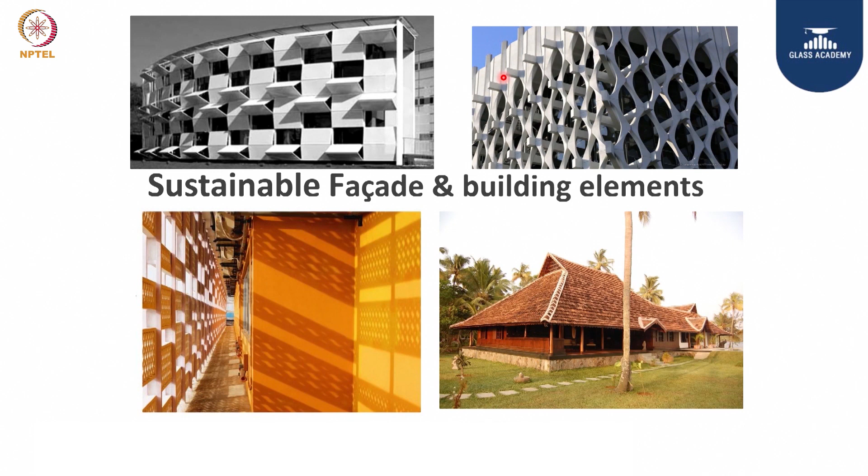In the next 40 minutes or so, I am going to talk about sustainable facade design. People are aware of how the facade looks when you look at a building from the exterior in various places in this country. But the facade design has to be climate specific. Depending on the location, the facade design should vary to reap maximum benefit on building performance and indoor environment, besides aesthetics. So you can't have the same design replicated everywhere in the country or across the globe. It should be decoded and indigenized to the local climatic condition.

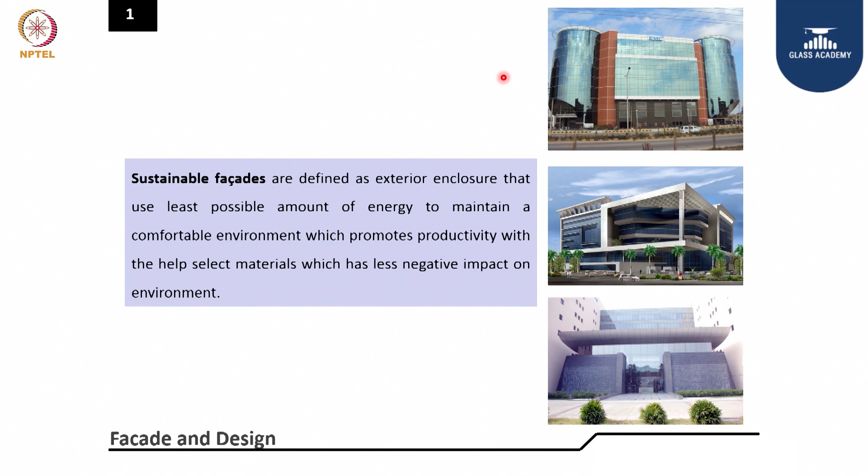This is how the facade should be designed to take care of your building's operational energy and occupant comfort. What is sustainable facade? It can be defined as an exterior enclosure that uses the least possible amount of energy to maintain a comfortable environment for building occupants, without having any negative impact on the indoor environment. The building material used for facade design should also have minimal negative impact on the environment. So it's not only about operational energy performance or occupant comfort, the facade material should be eco-friendly with very minimal negative impact. You can't eliminate the effect on the environment because we use virgin material, but you should know how to compare two materials and select the one with less negative impact.

When you look at why you need a proper facade for a building, why not just leave the building as is? It improves the building's aesthetic value. You can look at different buildings in different locations in this country and get a wow factor when you see certain buildings from the exterior. In early days we used to see the LIC building in Chennai about 20-25 years back, a tall building with an elegant look. So that is also required, and that's why the architect plays a major role in improving the aesthetic value of the building.

Due to the tropical climate in this country, the facade needs to minimize heat gain to the building. When you minimize heat gain, you save energy during occupancy, and when the facade gives comfort to the indoor environment, you improve occupant comfort and productivity. The focus should be on energy efficiency, how you bring daylight to the interiors, how you provide a view to the exterior environment, how you minimize glare to the occupant. Otherwise you have to put up blinds and cut down the daylight and the beauty of aesthetics, working in a dark environment with artificial lighting.

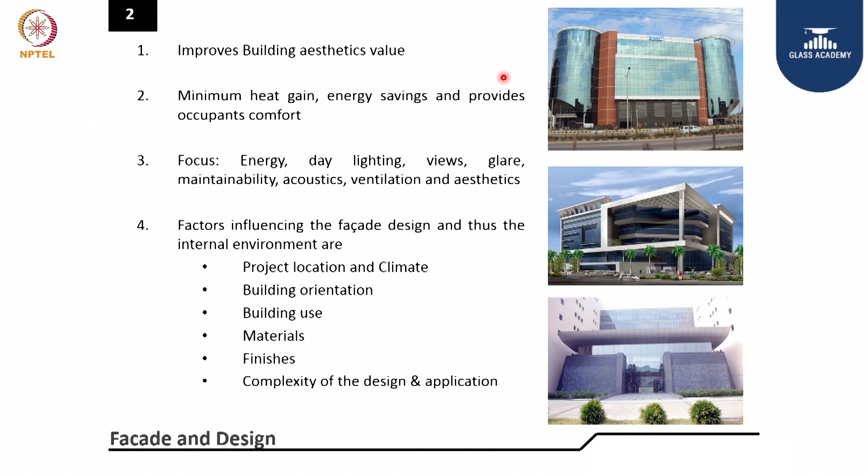It's like a person wearing clothes. So it's very essential for facade engineers and all other system engineers to be part of the design from the start, to ensure the facade is properly conceived to get the maximum benefit out of it.

Let us talk about orientation—how it has to be in India. For our warm climate, we normally get cool light on the north, and south can be managed easily. You can't have more exposed area in east and west. If you have the opportunity in a site to orient your building, we normally go with more north-south orientation and put less load on the east and west. Even if we get east and west exposed areas, we can create some space that can be utilized for services like a service core, lift and toilet facilities, which act as a heat sink so that heat from the east and west in the morning and evening can be arrested to a large extent. So normally our exposed areas should be more north and south facing.

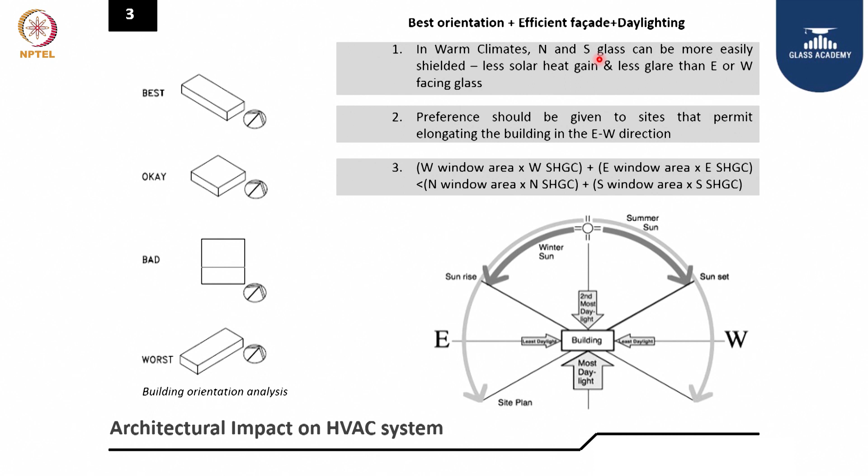North will be a cool light. You can have more glazing to get that daylight penetration to the interior. South can be managed with some sort of facade design in terms of projection material.

The orientation, once you have an orientation, normally we have two standards we follow for the glass selection. One is Energy Conservation Building Codes of India, the latest 2017 standard, and ASHRAE 2010, the latest standard that has come into the market. Both define the specification for our climate. ECBC defines India into 4 climatic zones, and ASHRAE defines 1.

But more or less we are talking about SHGC of 0.25 as a standard for India. So our study with 400-500 buildings shows we need to target around 0.2 to 0.25 solar heat gain coefficient to optimize the heat ingress to the building and bring the optimum daylight.

So north, yes, though the standard says 0.25 SHGC, but for north you can still relax, go up to 0.5, 0.6, because there we are getting a cool light. The rest of the areas like east and west, preferably reduce it to 0.2 to maximize the benefit.

Also you can have overhangs wherever required on the facade. You can look at here, so that the projection angle can be optimized or designed based on the heat ingress and sun path study, to get the sun angle hitting the bottom, not the glass.

So the projection angle for the sun has to be designed so that the sun angle will never hit your glass. That way you can get diffuse light to the interior, not direct heat gain on the glass, which affects your indoor building performance. So projection angle and projection depth has to be decided based on the glass height and width.

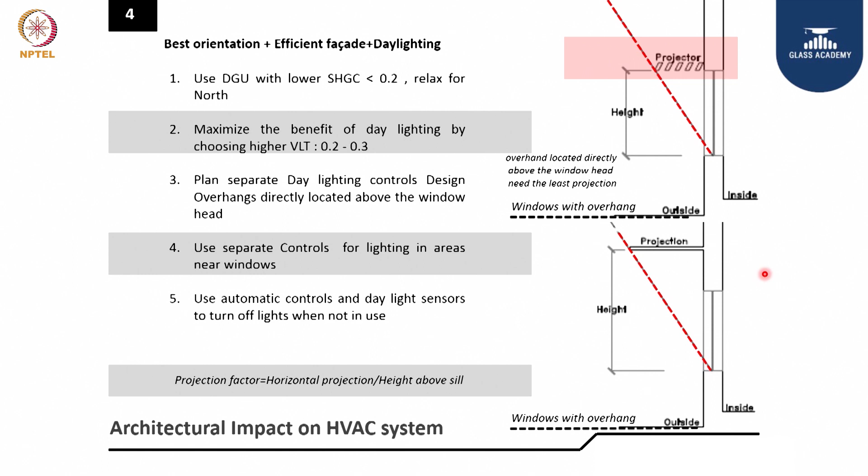This is how the general approach for the facade design and projection, or sun plus glass selection works. You can see the projection angle will be smaller here since the window height is small, and when the window height is more, the projection angle has to be a little more, so that light will not hit the glass directly.

So particularly when you talk about north side, you can go up to 0.45, even 0.5 sometimes, but the rest of the areas you can control. Predominantly you have to reduce it to 0.2, so that the light penetration can be optimized, at the same time heat ingress can be minimized.

So ultimately I look for a window to wall ratio of around 20-30%. That is the best number to be achieved for optimizing the heat gain to the building. So 20-30% window to wall ratio is the best one to design for a building to optimize the heat gain.

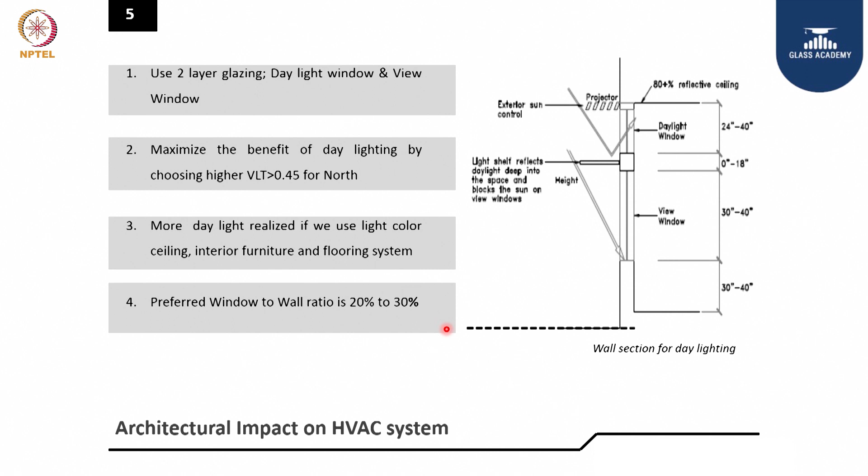Then when you talk about the U factor, there are three major factors we normally look at for a glass. One is U value, second one is SHGC, and the third one is visible light transmittance. So all three have to be balanced to get the best out of the glass facade you have.

Glass is very vital for a building, wherein we need to get the view to the exterior and the daylight penetration. At the same time, how do you optimize heat ingress? So we normally go for lower SHGC, lower U value, and higher VLT. That's how the combination is worked out for a building to optimize performance.

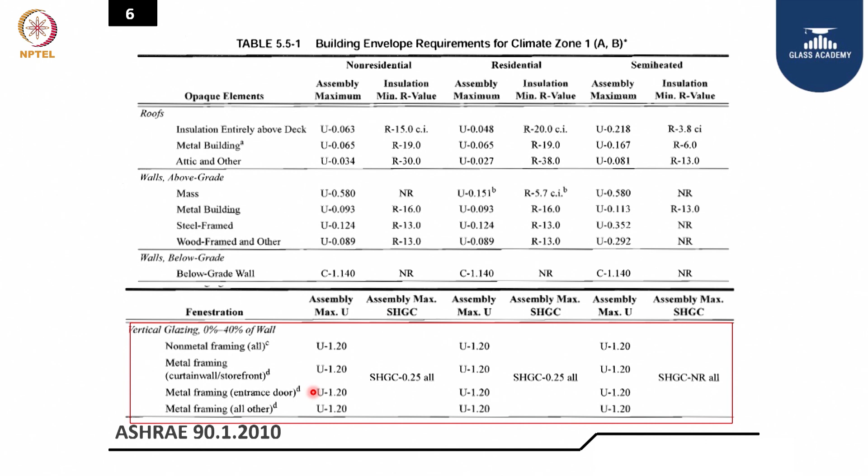This is from ASHRAE 90.1 2010 standard. Even ECBC classifies into 4 climatic zones: composite, hot and dry, warm and humid, and cold.

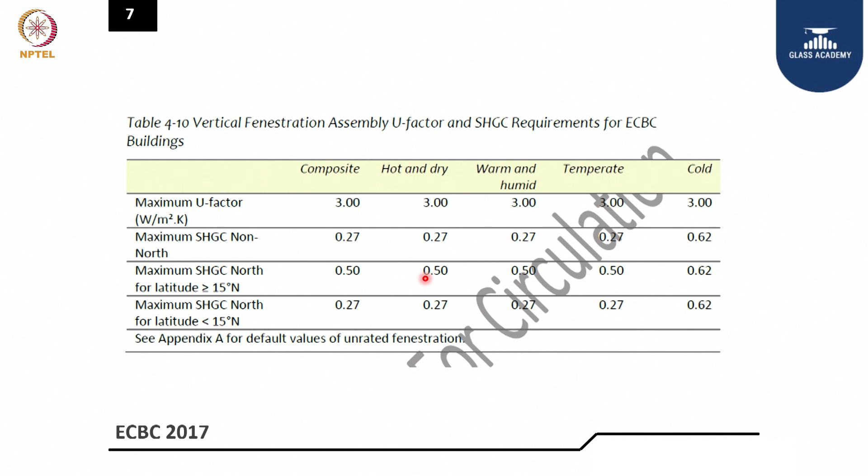So these are the major 5 climatic zones, and the factors are defined here very clearly what kind of glass needs to be selected for this building. The moment you have a facade design or the surja has been designed, these values can be a composite value, including your projection factor plus glass. Together you can even relax a little bit on your glass to get the total performance of the building.

You can look at some of the facade designs, what is happening, and this is an unconventional way. You would have seen all conventional designs here: plain wall, glass, recessed glaze windows, then the shading, surjas and fins, etc. These are some of the unique things.

You can see the green walls, fully covered green walls, and here you can see the fins made out of wood, which is motorized, and depends on the day of the sun angle. You can adjust these blinds and control the sunlight heat ingress. At the same time, you can allow the light to penetrate, plus heat can be arrested.

And this is BIPV, building integrated photovoltaic, wherein you generate solar energy from the solar panels, which will arrest the heat ingress. At the same time, it allows light to penetrate.

Now you have a thin film technology, you can place it on the glass, which will generate power, and now people are coming with glass which has got inbuilt solar thin film, wherein you can generate power and also act as glass. And this is another one, R&D work is happening somewhere, I remember about in Germany.

Algae is formed in the glass in between 2 layers, which will arrest the heat ingress to the building and bring beauty to the building. This algae will be removed often to make it as manure for the garden, and it regrows, and they supply oxygen once in a while for the algae to survive.

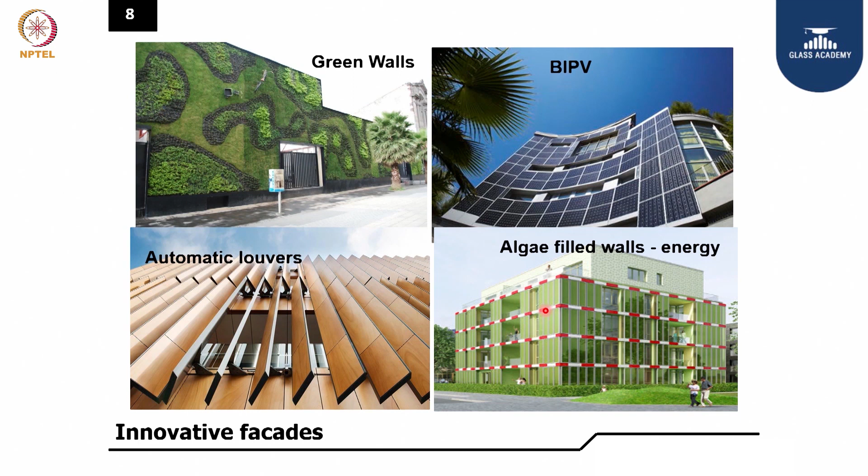So these are some of the unique designs happening to bring beauty to the building, at the same time improve the building performance and aesthetic value.

What are the tools available, normally we do in India? Basically, you have to go for facade shading analysis - how throughout the entire 24 hours, you can check for every day of the year how the shading and sunlight penetration affects the building. Then daylight analysis, how this facade is giving daylight to the interior environment, wherein you can control the artificial light and save energy.

Then heat gain analysis, how the heat from the facade impacts your indoor environment and air conditioning load. Then sun path analysis, understand the sun angle, then you can orient your building or design your facade to cut the heat directly into the building.

Then after all this analysis is done, finally you come to how this building is performing overall on energy - how much HVAC energy is consumed in this building, how much from lighting, how much from equipment. Even you can divide further into ventilation system, occupancy. So you have to bring this number, then revisit again, see how we can optimize to control this energy.

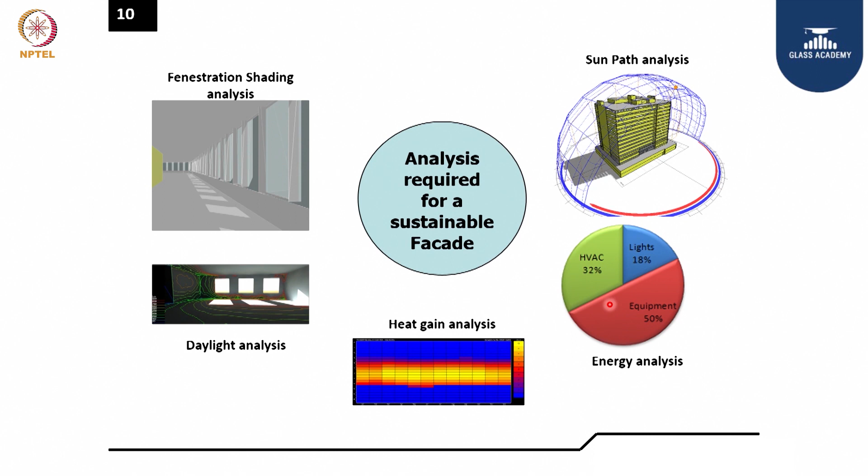So 32% in a commercial building is a good number. Can we do 29? The moment you have this analysis, you can keep revisiting and come back to the overall energy performance. So this is how the approach should be for facade selection and implementation tomorrow for any building.

And when you do the shading analysis, what does shading analysis bring you onto the table for you to optimize your facade? Impact on shading devices, what kind of shading devices you have for the facade, and optimum shading. Can I go with 600 mm Sarja or 400 mm or 200 mm or 1000 mm? That will be decided based on the shading analysis.

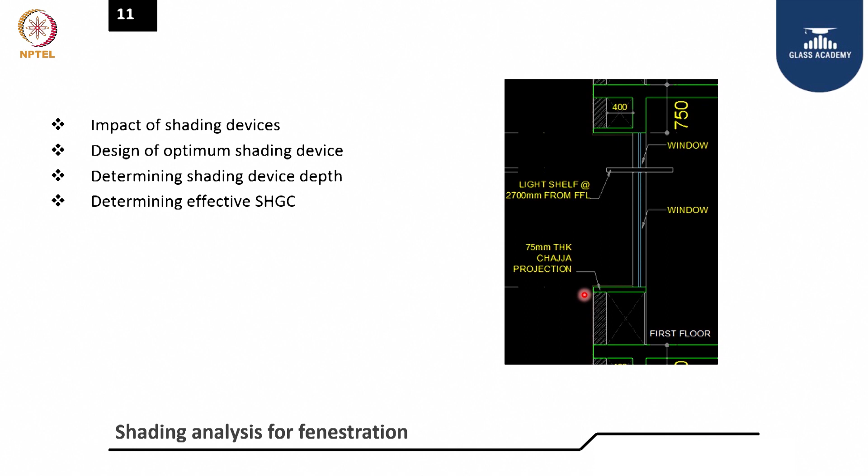And how much is the depth, and what will be the effective SHGC, and what will be the glass selection for a particular fin or Sarja or projection device. So that overall impact has to be seen and implemented to not only save energy but also save on your investment.

You can look at this typical analysis performed for one of the commercial buildings in Andhra Pradesh. When you have no shading devices, you can see here how the daylight penetration is happening - some places 100, some places 77, 61, the good daylight penetration. And if it increases to 300 mm, you can see again the shading impact on overall performance, and 400 mm, 600 mm. So you can keep increasing in your simulation package and see.

Here if you overall look at it, here is the result. If there is no shading, you need to have a glass of 0.27 solar heat gain coefficient, double glaze unit. So when you increase your shading to 300 mm, you can relax on your glass, because we are shielding your glass from the direct sunlight. So at 400 mm, 500, 600 mm, you just need a 0.35 SHGC, whereas with no shading, the same building requires 0.27 to get the daylighting and the required energy performance.

This way you look at it, these two you can very well see 0.27 to 0.35 will definitely have an impact on your investment on the glass. This will be costlier in terms of glass performance, and this investment for 0.35 is relaxed. So the facade translates into the glass selection investment being more critical. You can't have facade design in isolation and glass selection in isolation. It has to be a combination of facade fins and the selection of final glass SHGC value. This way you can optimize it.

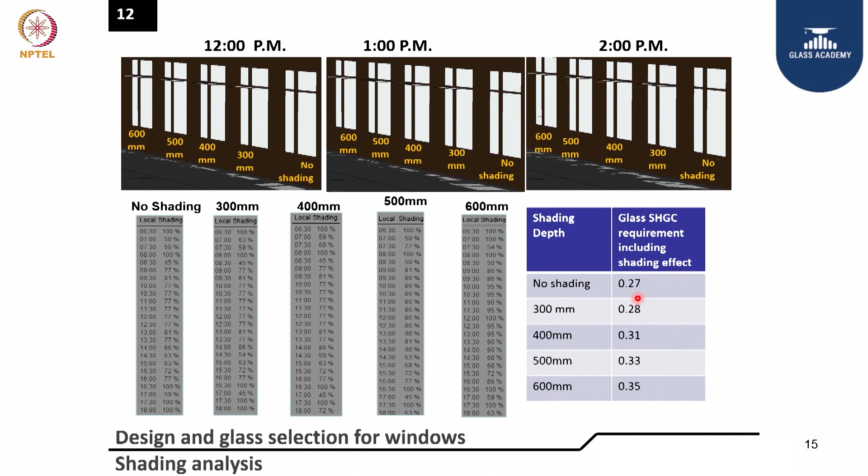So finally, if you look at overall in this building, the 400 mm projection depth is ideally suited for this building in Andhra Pradesh, where we optimize the investment on the glass, and also get enough daylight penetration and saving on the HVAC during operation. So this is how the facade design needs to be conceived and implemented for a building.

The next one, you can see how the shading has an impact on the daylight penetration inside. If you look at 9 AM, then 3 PM, 4 PM, 5 PM and 6 PM. Up to about 2 PM, there is no sunlight penetration. Whereas here, you started getting sunlight penetration inside, gradually increasing, and by 5 PM, 6 PM, it's west orientation. When you have west orientation, it's direct sunlight, 90-degree heating on your glass.

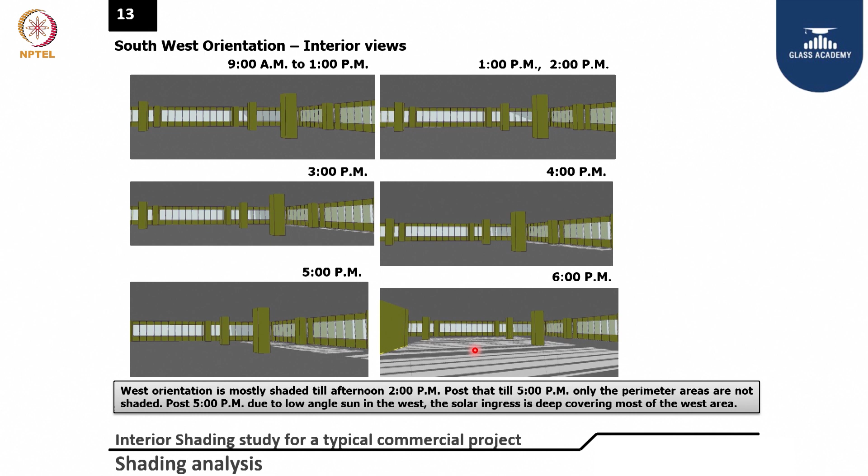So whatever fin you provide, horizontal fins, you can't arrest this kind of sunlight penetration. It has to be vertical fins on the facade, and it should be a motorized or movable facade designed to cut down this heat gain or sunlight penetration beyond 3-4 PM. This gives an idea for you to understand how your facade and glass really behave in your building, and what kind of facade material you should have for different orientations to arrest heat gain and also minimize daylight penetration when excess daylight is coming into the building.

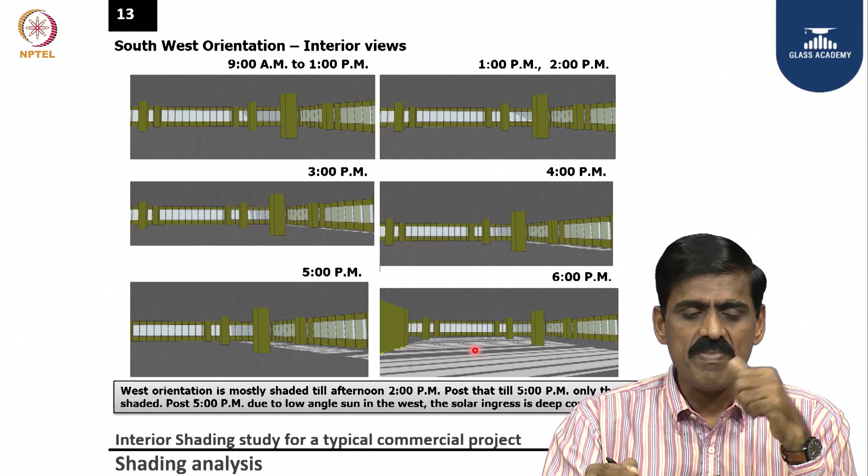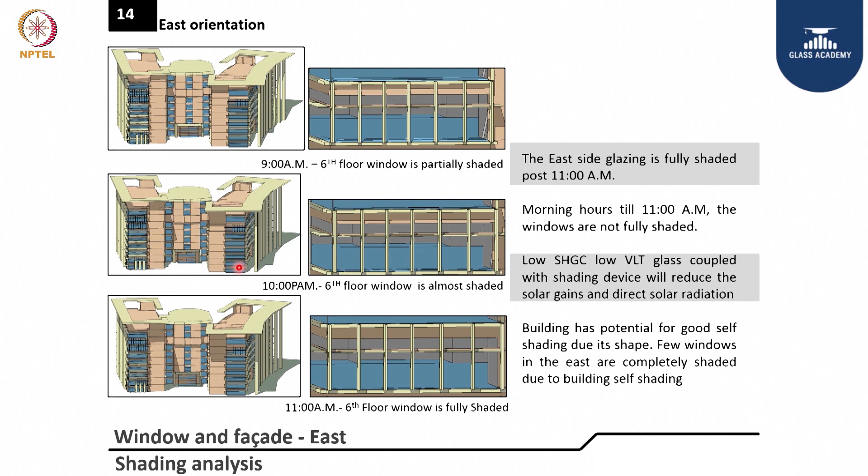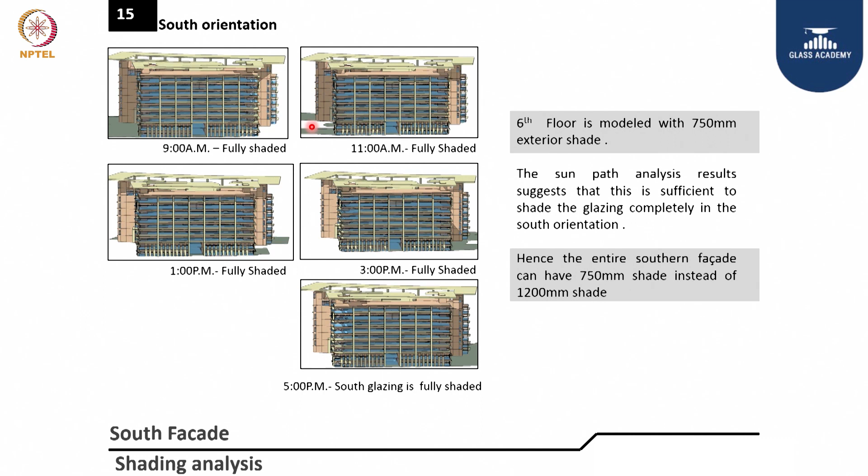So that's what I said in the beginning, south and north can have more exposed area and more glazing. South can be treated effectively with fins and chajjas. In west, you can't do it after 4, it will hit directly on the glass. So minimize the opening on the west and east, and go more on south and north to effectively implement daylight penetration.

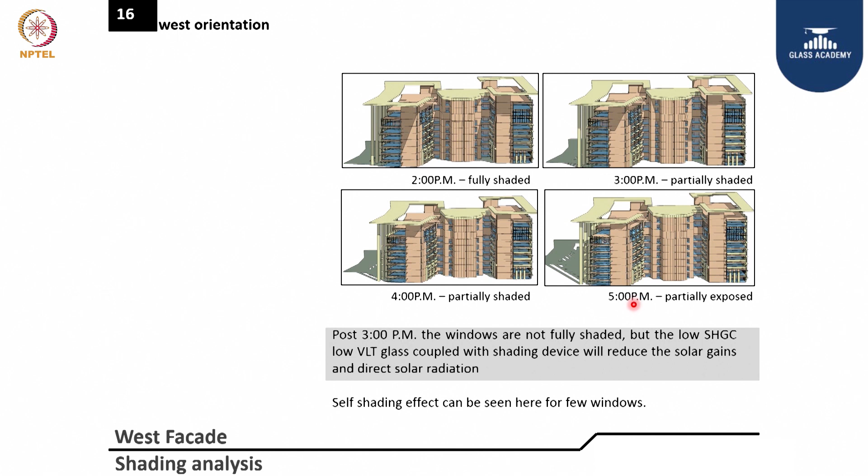West orientation is similar to east. Here you can see the exposed areas. Yes, you have self-shading, and up to 2 PM you can see it's fully shaded. These are all shaded. You can see this glass, and the moment it goes after 3 PM, the sunlight is directly coming and hitting, and after 5 PM almost it's getting exposed. So this is the problem on the west side, you need to have building orientation with minimum glazing on the west, so that you can avoid sunlight directly hitting your facade and creating discomfort for the indoor environment.